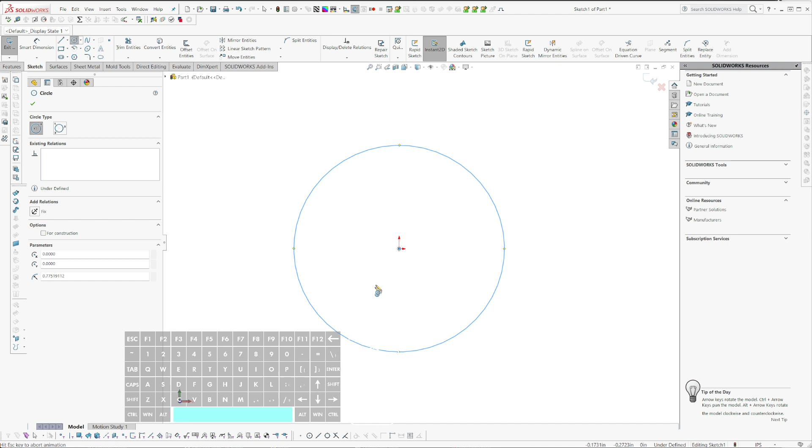So let's say the tool is going to be, I don't know, 7 inches long, 8 inches long. Let's make it 8 inches long. So that's just representing the overall.

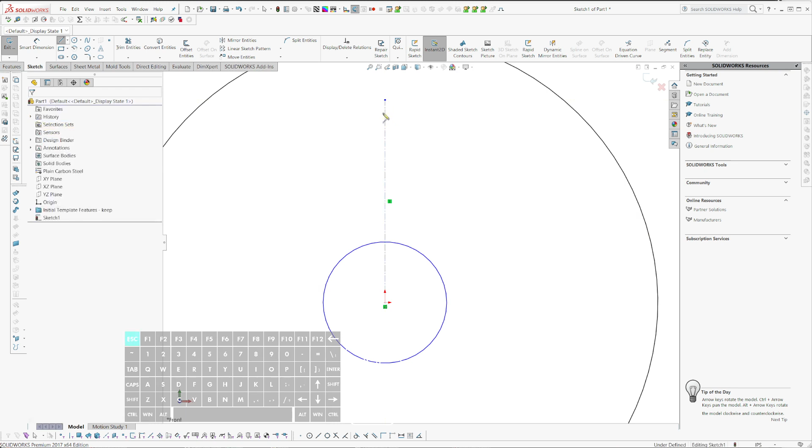And then, so here's basically my hinge area. And I'll put a center line because I'm going to mirror these. I'm starting to get slightly annoyed by the flashing there, but that's okay.

I guess I'll just make this blunt for now. I want to say that, so right, this is basically going to be the tip of the tool.

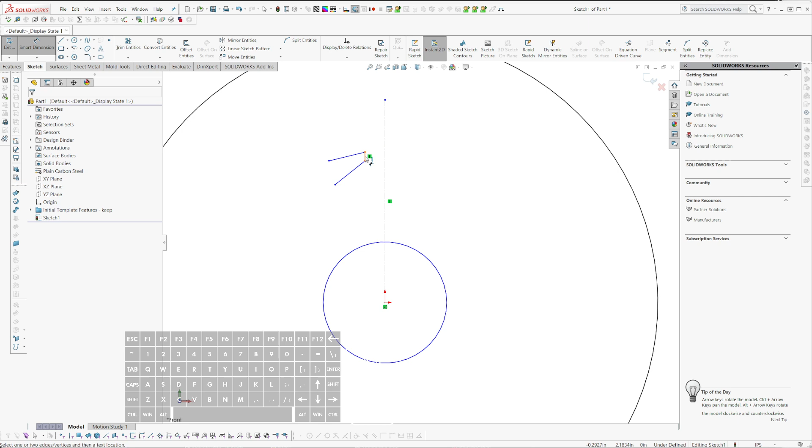Alright, and I'm going to make this part, the height of it, or the length of it I should say, it's going to be pretty thin so it can get behind those. So I'm going to say 50 thousandths.

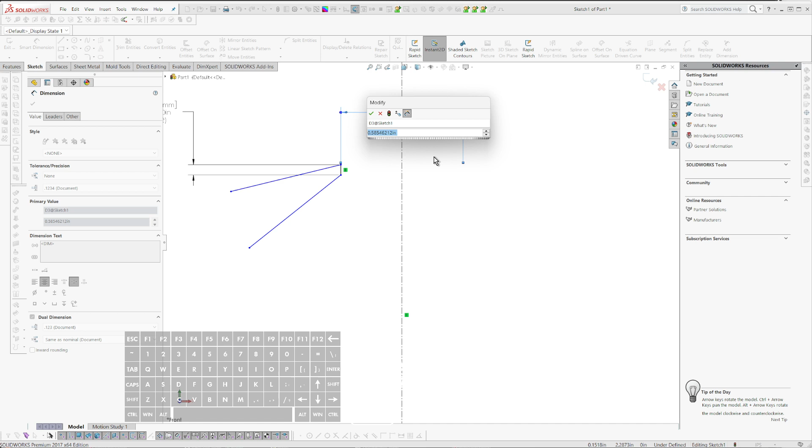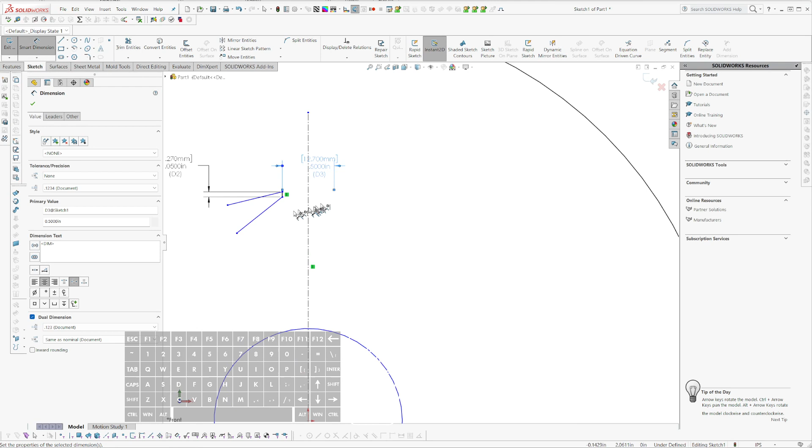So back to here. I probably, this angle is probably okay. This angle's probably good, and I'm just going to define them where they are rather than have them just misbehave on me.

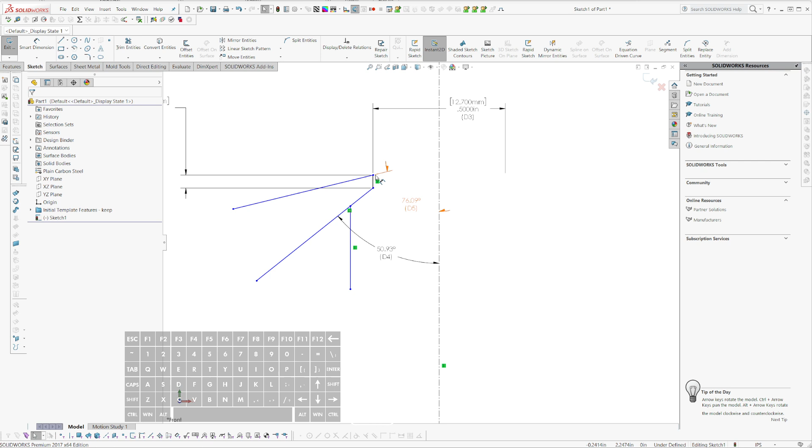And then I'm going to have something like this, and I'm going to fix this point just to fix things in space. I will probably, you know what, actually I'm going to dimension it from the pivot point. That way it'll be easier to adjust it later.

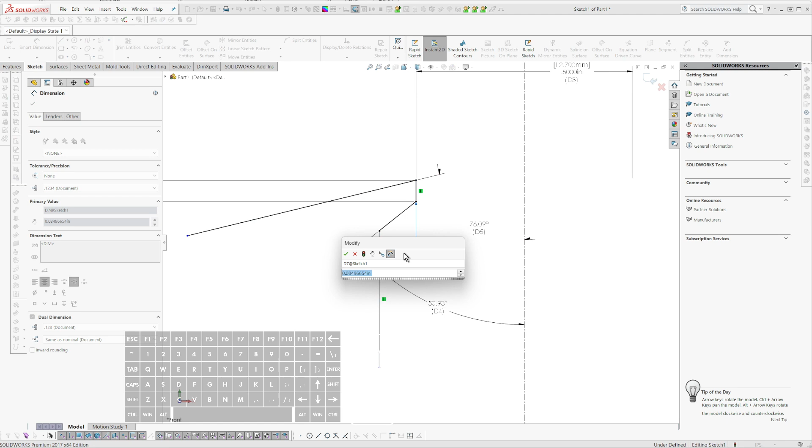Alright, so now those are fully defined except for the tips. I'm going to trim this guy here, and I want this, this doesn't need to be very far. This can probably be like 3/16, so 0.19. 0.1875 is 3/16 of an inch.

That looks bigger than I expected it, but it's probably about right. I think an eighth inch. It's probably actually like an 1/8 inch, or even 3/32, but I want to go 3/16 just to give me a little extra headroom there.

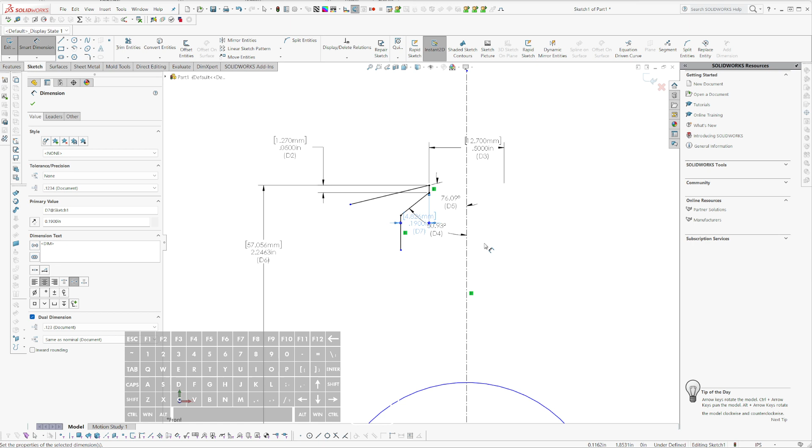Call that 50. Gee, that might be too much. I'm gonna make this 40 thousandths, just to be on the safe side, to make sure it'll dig under there.

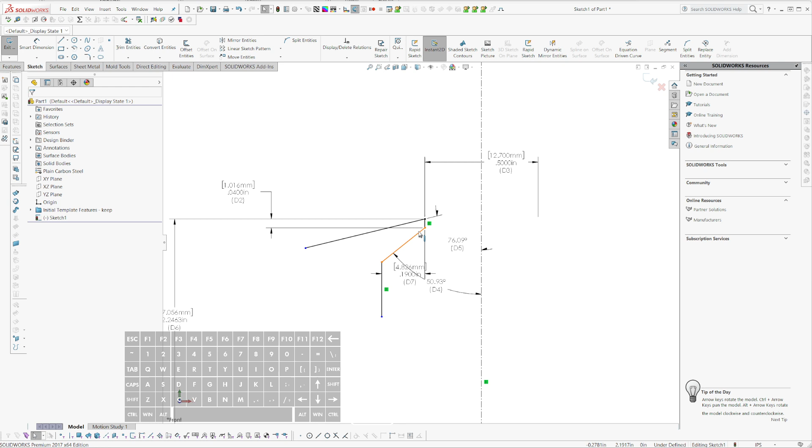But I also want it to pull it up a little bit. That's the thing. So yeah, I'm going to call it that for now. And of course we're going to test this, and it's not going to work, and so we're going to adjust it until it works. I'm exaggerating. It might work. It'll work a little bit. I'm pretty confident. I'll probably do it out of nylon, so it'll be pretty strong.

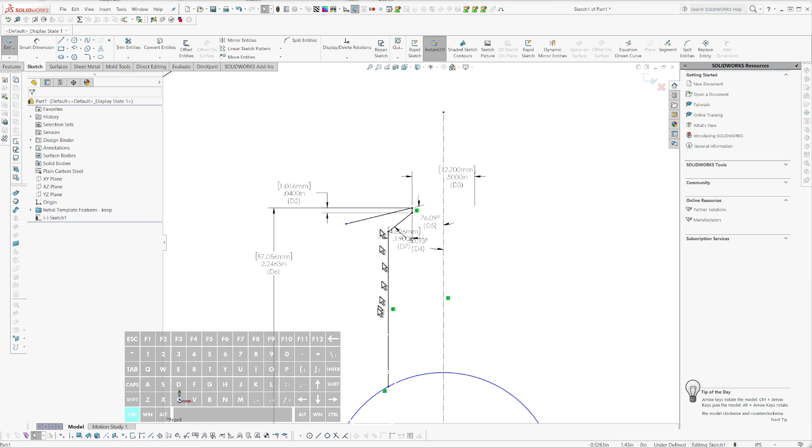Alright, let's just extend this guy back. And I don't want these to deflect, so I'm going to make this fairly tapered, so it'll be pretty rigid. So when I squeeze, yeah, I need to bring this.

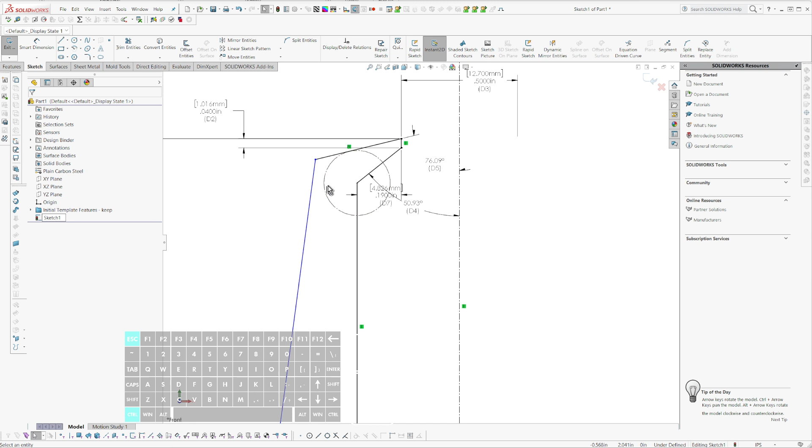I'm gonna do a little trick here where I go like so. This will be construction, and that's already tangent. And I actually want this. Yeah, I guess if I make these two tangent, I would make this one a little further away, but this one tangent, that'll be close enough to good.

Let's put this, let's define this angle also. So I just want it to be fully defined. And that way, now I can bring this shorter, because I want to have quite a bit of leverage on this. And I don't need a lot of clearance.